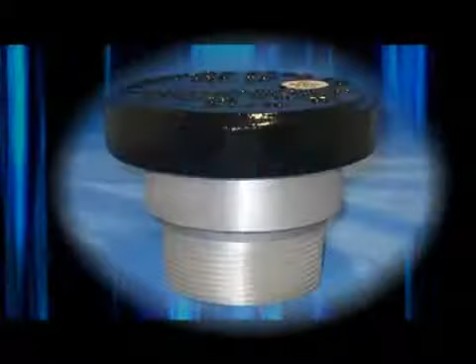The Morrison Figure 244 series emergency vent is designed for use on above-ground storage tanks. When properly installed, the 244 will not only assure compliance with code requirements, but will also prevent tanks from being overpressurized or rupturing in the event of a fire. It's important to understand that each vent is specifically sized for each tank. So before beginning, be sure to consult with the Morrison Brothers publication, Venting Guide for Above-Ground Storage Tanks for proper sizing.

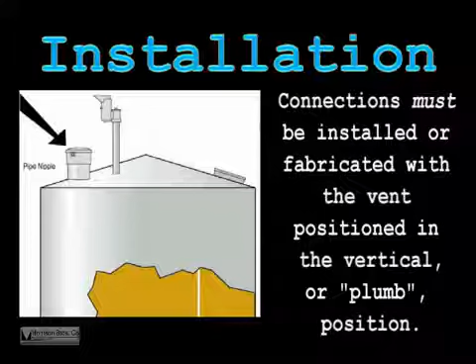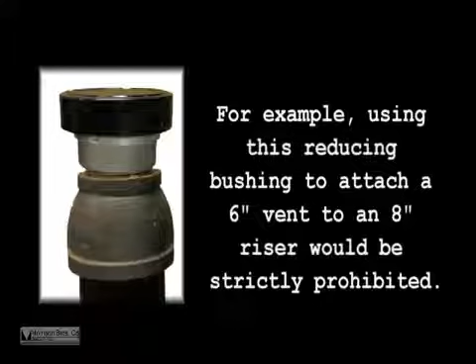Before beginning the installation, there are a few items to note. First, connections must be installed or fabricated with the vent positioned in the vertical or plumb position. There should be no reduction in pipe size between the tank and the Figure 244 emergency vent. For example, using this reducing bushing to attach a 6-inch vent to an 8-inch riser would be strictly prohibited. Now it's time to get started.

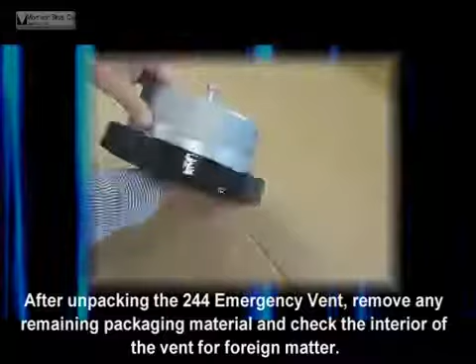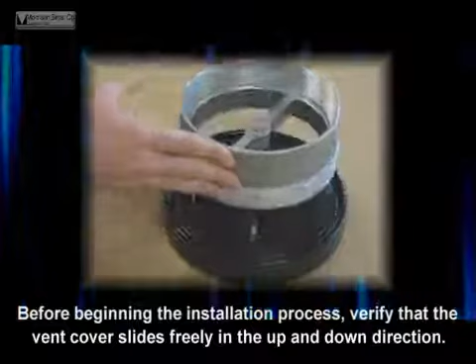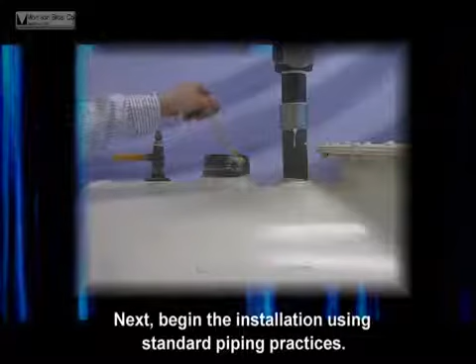After unpacking the 244 emergency vent, remove any remaining packaging material and check the interior of the vent for foreign matter. The O-ring surface should be clean and free of any dirt or particles. Before beginning the installation process, verify that the vent cover slides freely in the up and down direction. Next, begin the installation using standard piping practices. Start by applying a fuel-resistant, non-hardening, non-adhesive, anti-seize sealant to the threads.

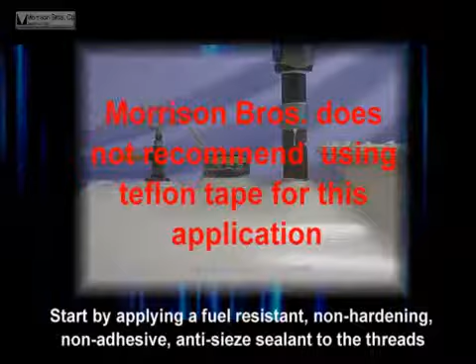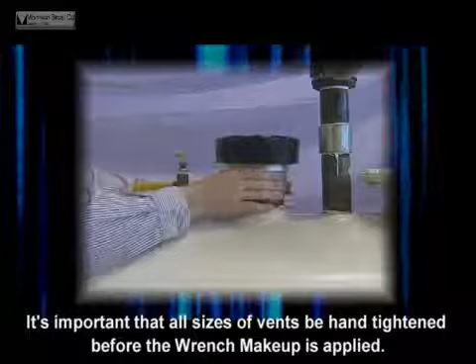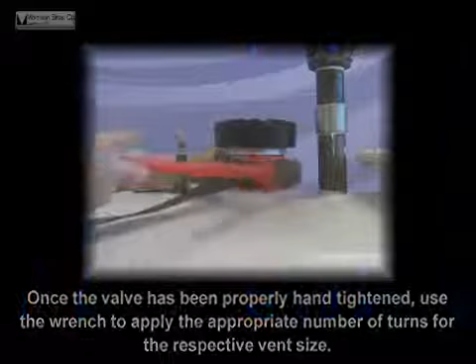Position the 244 vent on top of the tank connection and hand tighten it to engage the threads. It's important that all sizes of vents be hand tightened before the wrench makeup is applied. Once the valve has been properly hand tightened, use a wrench to apply the appropriate number of turns for the respective vent size. To determine the correct number of turns, refer to the wrench makeup specification chart, which can be found on the instruction sheet. It is important to note that over-tightening may cause damage to the vent. A tolerance of plus or minus 1 turn is allowed due to the variability of the thread form.

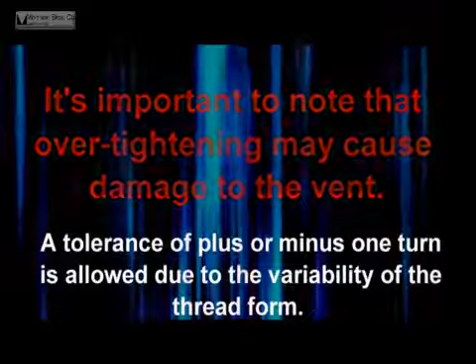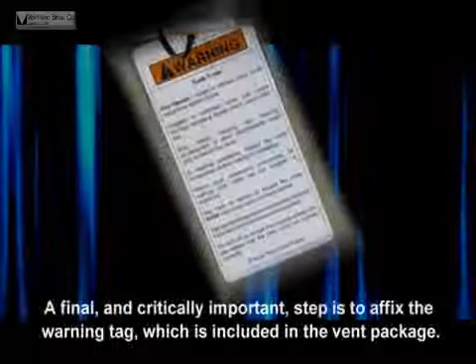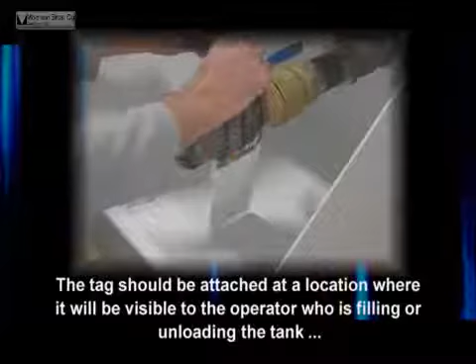Once the vent is installed, slide the cover up and down to verify that it still moves freely. A final and critically important step is to affix the warning tag, which is included in the vent package. The tag should be attached at a location where it will be visible to the operator who is filling or unloading the tank, preferably near the dry disconnect fill adapter. The 244 emergency vent requires no assistance during operation. The cover will not open until the pressure of the tank reaches the pressure indicated on the vent cover.

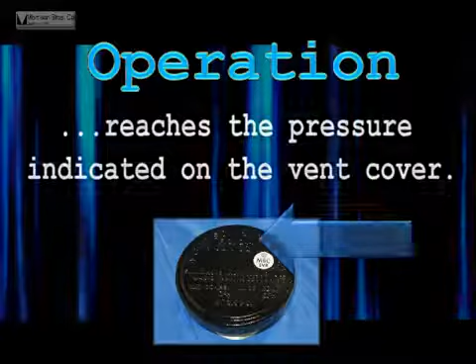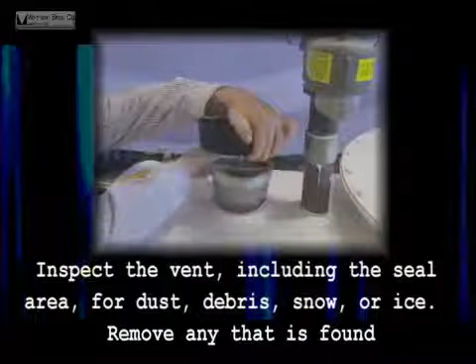Annual inspections should be performed by an individual familiar with the operation of storage tank vents. If freezing conditions are present, the vent should be inspected immediately prior to servicing the tank. To check for proper operation, slide the cover up and down several times to make sure that it moves freely. If the vent cover sticks or binds to any degree, the vent should be replaced. Inspect the vent, including the seal area for dust, debris, snow, or ice. Remove any that is found. Inspect all valve components for damage, corrosion, or excessive wear. If any damage is found that could impede the operation, the vent should be replaced.

Finally, inspect the vent warning tag. Make sure that it is legible and attached at the location that will be visible to anyone servicing the tank. If the tag is damaged or difficult to read, contact Morrison Brothers at 1-800-553-4840 for a free replacement.